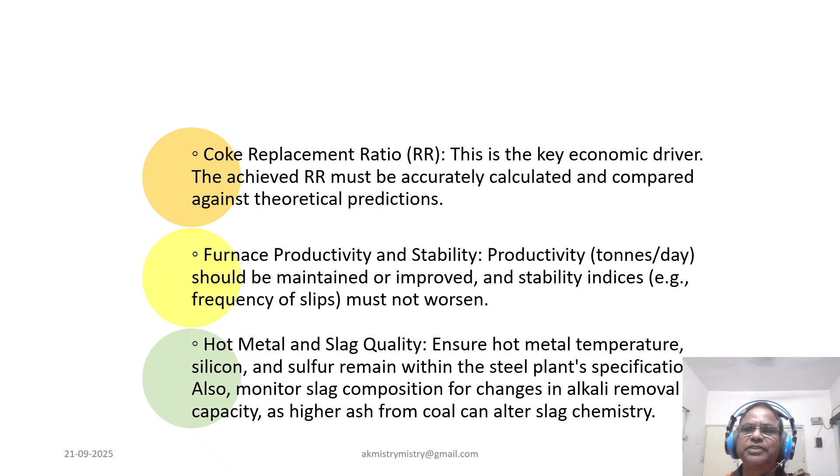Now coming to the PCI system and coal properties. As you must be knowing, stable pneumatic conveying is non-negotiable. Pressure fluctuations reveal flow instability which can derail operation.

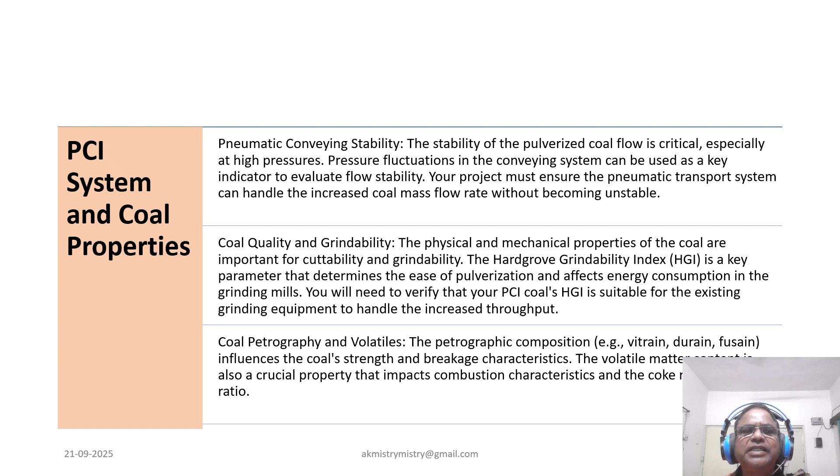So coal quality matters: grindability, petrography, volatile content, and all of these affect combustion and coke replacement in a big way. The Hardgrove grindability index must match our mill capabilities. We are not just injecting coal, we are engineering a controlled reaction.

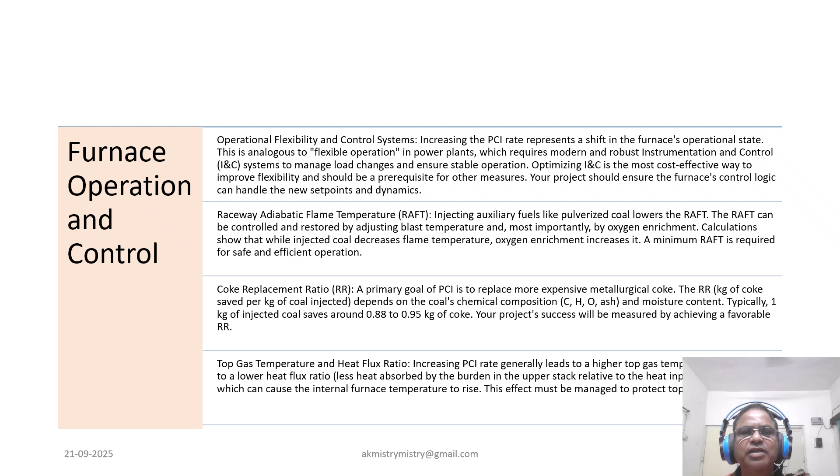So coming to raising PCI rates, we shift the furnace operation state. As we all know, like a flexible power plant, we need robust instrumentation and control systems. RAFT, the raceway adiabatic flame temperature, drops with coal injection but can be restored via oxygen enrichment. Every kg of coal injected must save coke efficiently. Top gas temperature rises with PCI, so heat flux must be managed to protect equipment.

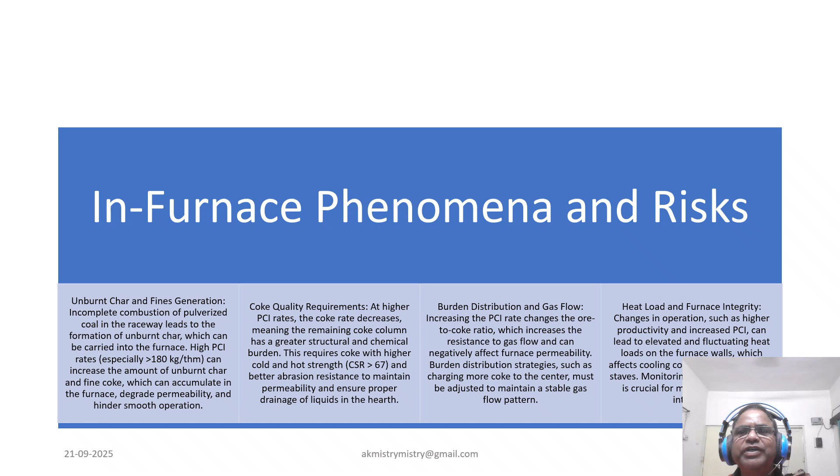Now coming to the in-furnace phenomena and risks. High PCI rates generate unburned char and fines which degrade permeability. Coke quality becomes critical; higher CSR and abrasion resistance are needed. Burden distribution must adapt to maintain gas flow, and with elevated heat load, stave temperature must be monitored to protect furnace integrity. So this is where science meets vigilance.

Now, pneumatic conveying stability, as you must be knowing, this is the main lifeline of the PCI system. Stable conveying prevents tuyere blockages and ensures symmetric fuel distribution. It improves combustion efficiency and creates a controlled environment for data analysis. So, without stability, we cannot isolate the effect of PCI increase. So, this is the foundation before any coal reaches the raceway.

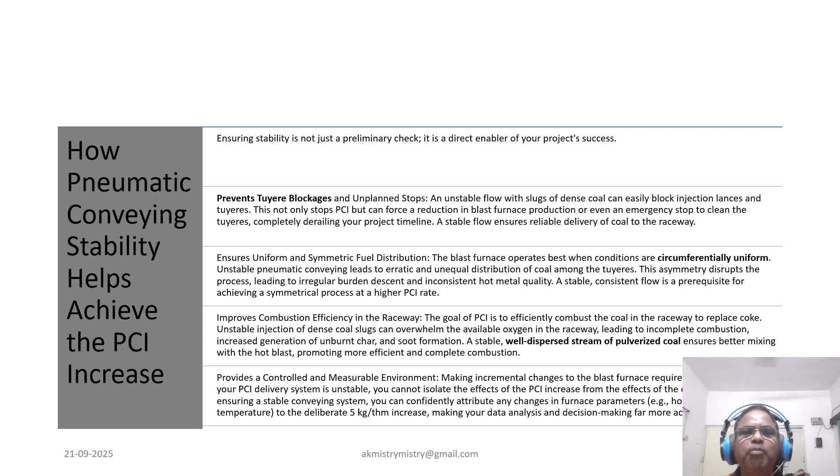The flow must be predictable and uniform, because unless it is uniform, symmetry of the furnace operation cannot be ensured. Now coming to the flexible operation and control of PCI.

And we know that PCI increase is not just a fuel change, it's a shift to flexible operation that demands a control strategy capable of handling new dynamics. Faster raceway reactions, slower burden descent, and increased thermal stress must be anticipated. So monitoring tuyeres, staves, and refractory lining becomes very essential, and control logic must evolve with the process in order to combat the anticipated changes.

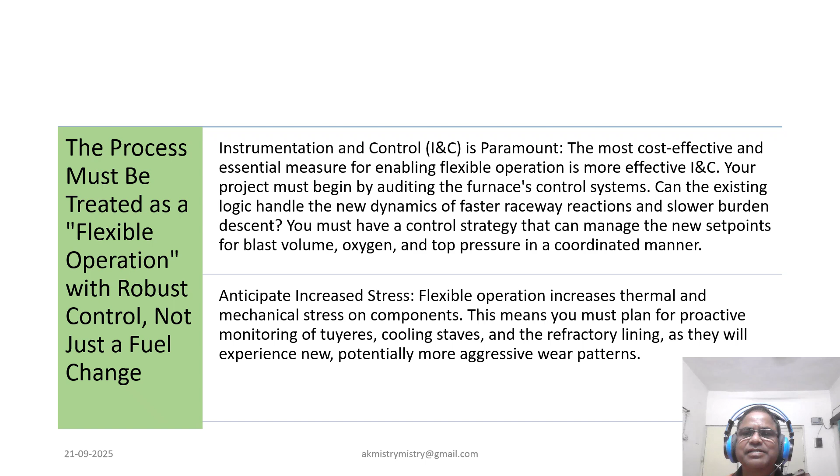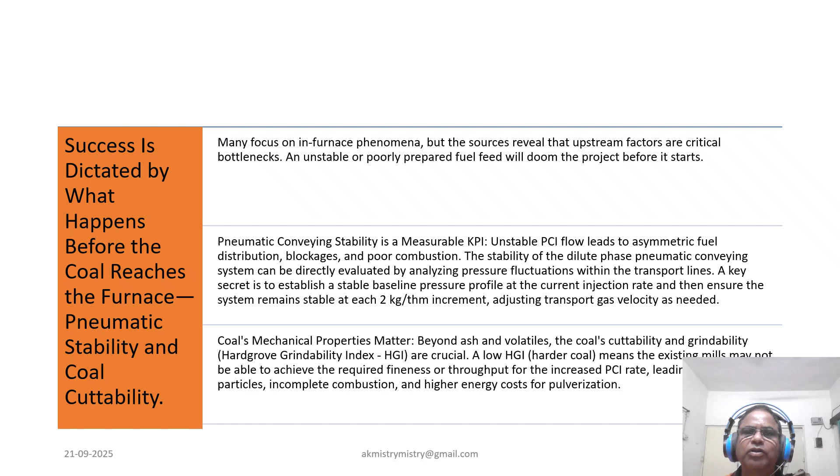So now coming to the... focus is on in-furnace phenomena, but upstream factors are the real bottleneck. Unstable fuel feed will doom the project before it starts. So pneumatic stability is a measurable KPI. The pressure fluctuation must be tracked. Coal grindability determines whether our mills can meet the increased demand or not. So this is where success begins.

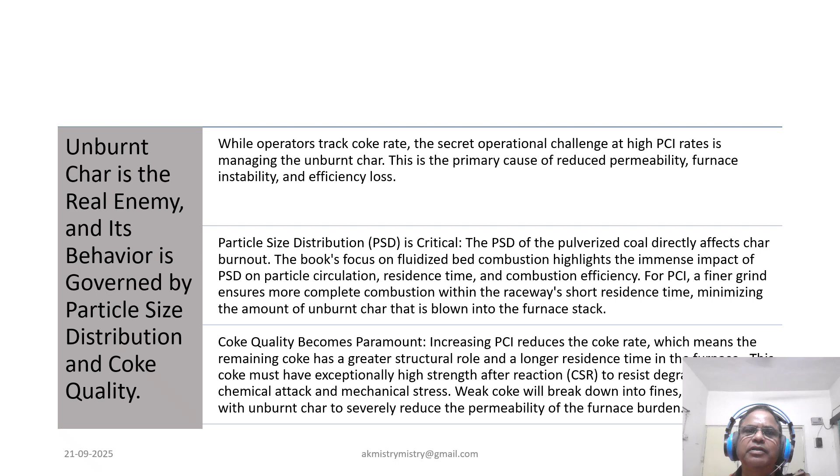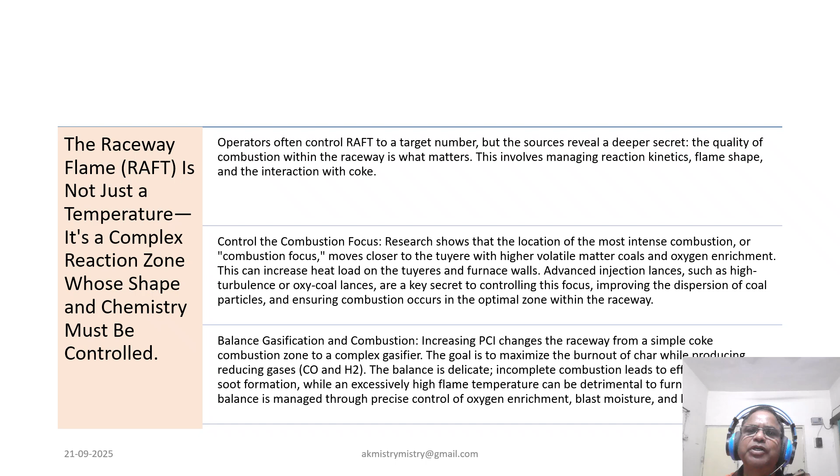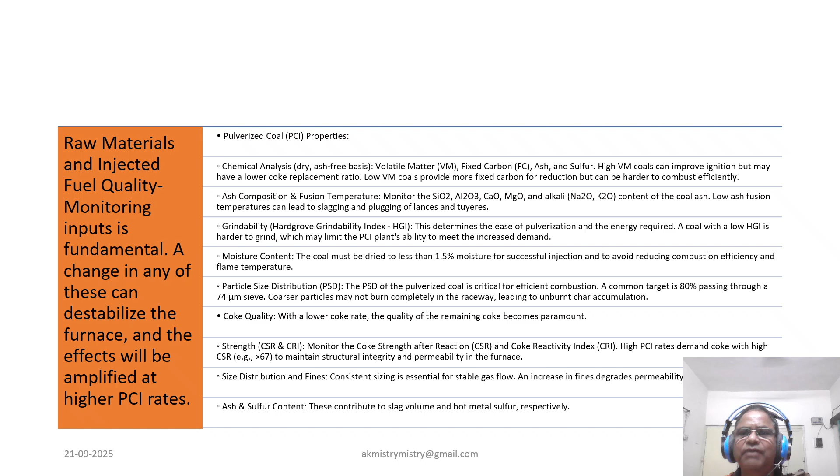As far as raw material and fuel quality is concerned, PCI coal properties, VM, FC, ash, sulfur must be optimized. As we know, ash fusion temperature affects slagging risk and moisture must be below 1.5%. Particle size must hit 80% below 74 micron, and coke must have high CSR and consistent sizing. Every input affects furnace stability, and effects are amplified at higher PCI rates.